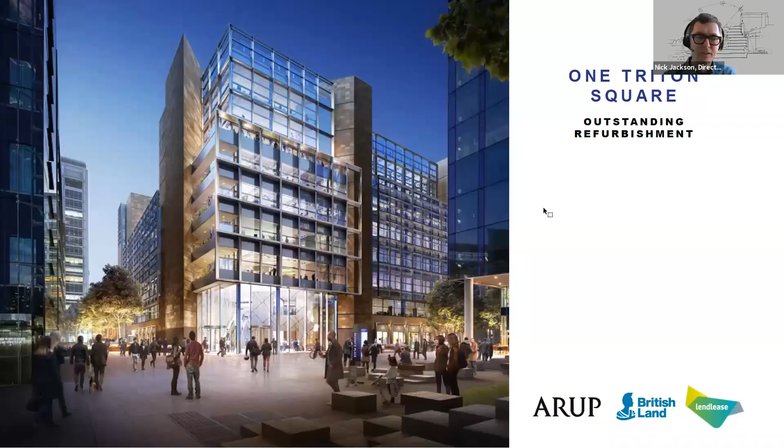Thank you, Will. Right, let me just share. So hopefully everybody can see that. So thank you for this opportunity just to explain a little bit about the work we've been doing at Triton Square. The building's been on site for 2.5 years, coming very close to completion now, and will emerge just as we come out of lockdown, actually, which will be very exciting.

I think everything I'm going to talk to you about this morning really wouldn't have been possible without the teamwork that has gone on between Arup, our long-standing client British Land, and the contractor Lendlease, who we're working very closely with. What we've achieved on the project in terms of the initiatives around sustainability and particularly carbon have only been realized through the collaboration and commitment from all three parties to achieve this.

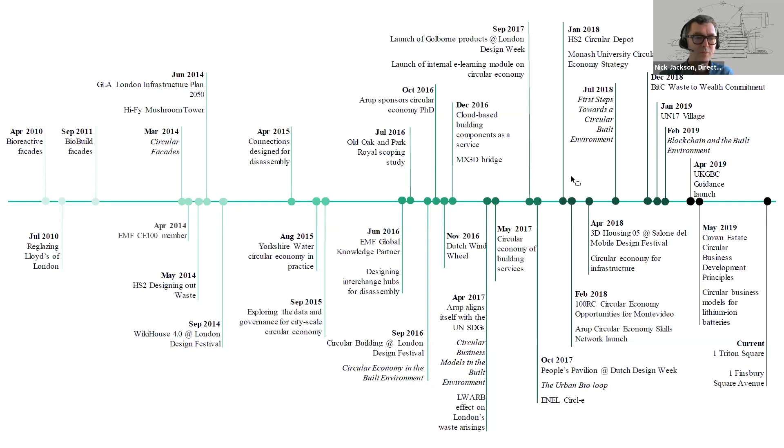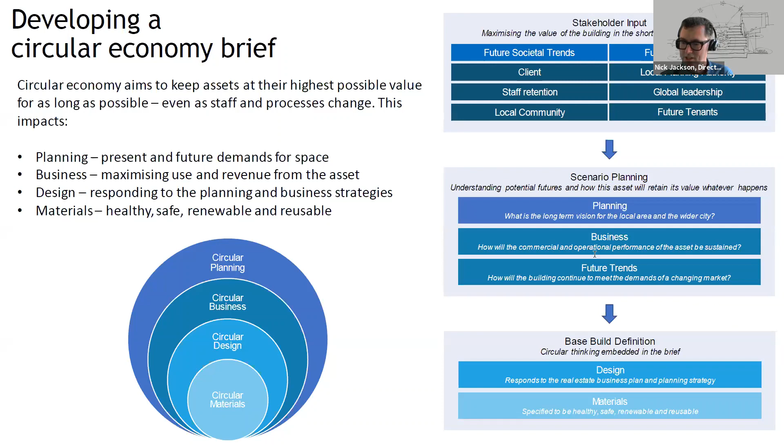Triton Square didn't come from nowhere. Arup have been working in this sector for over a decade in terms of thinking about circular economy. We've been looking at it from a point of view of investment, experiment and exploration over 10 years. We've worked in that sector developing a framework for property in terms of developing a brief that we use internally around the planning, the design, the use of materials, all building around our approach to circular economy. This works across our whole business and is a strategy that is growing very rapidly in our thinking and work.

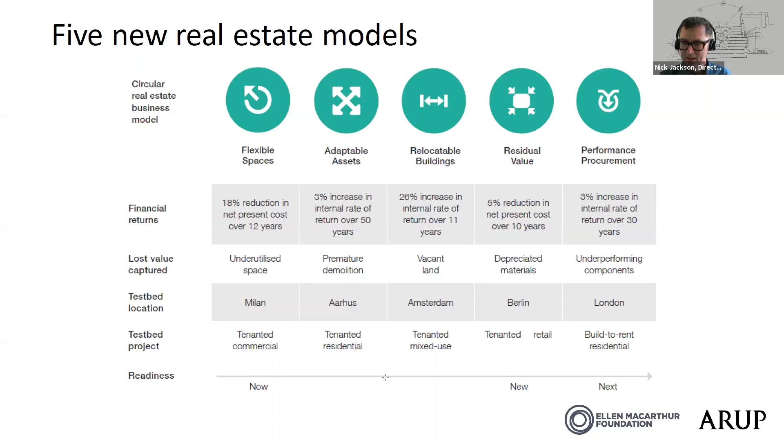Our relationship with the Ellen MacArthur Foundation is well established, and we have a very close partnership there. That has worked through equally with developing an approach to real estate across a number of trial projects we've developed in conjunction with other partners like RICS and JLL, in terms of how we embed circular economy thinking in our approach. So I just wanted to set the scene really in terms of where the thinking on the project at Triton Square has emerged from.

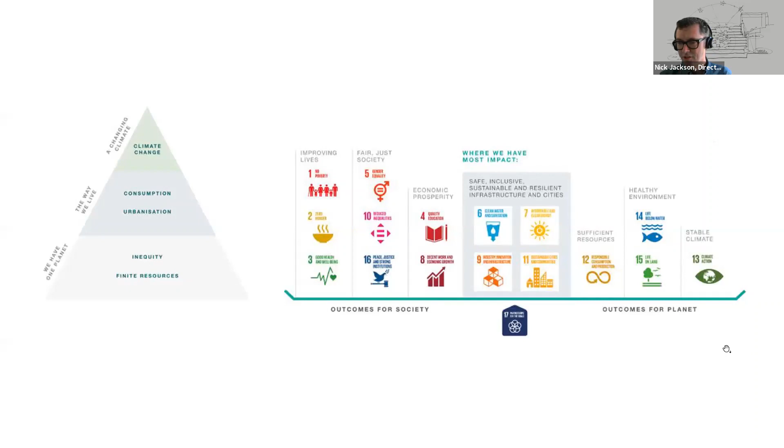That sits alongside our commitment at Arup to align our business in all that we do, and our activities, to the UN's Sustainable Development Goals, the SDGs. As a global organization, we've adopted those 17 initiatives and goals to structure our work at all levels and embed them in our strategies around design work and the projects and thinking that we take on.

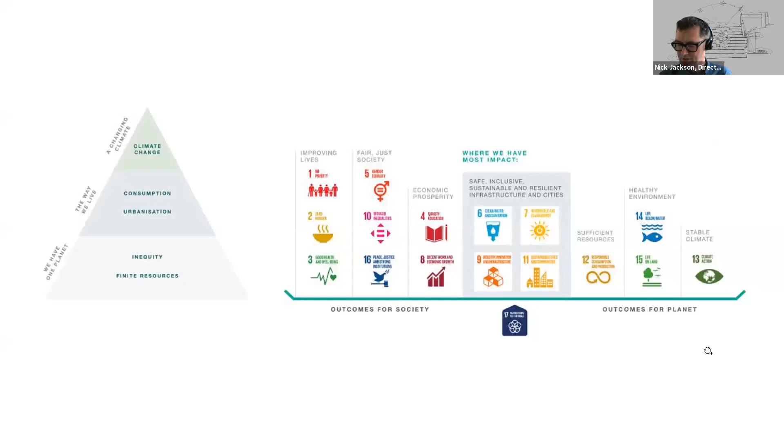At the moment, we see ourselves as on a journey. We're moving out of a point of green, sustainable design and looking increasingly to how the thinking in our work can lead towards restorative and ultimately regenerative design in the way we approach our work in the built environment.

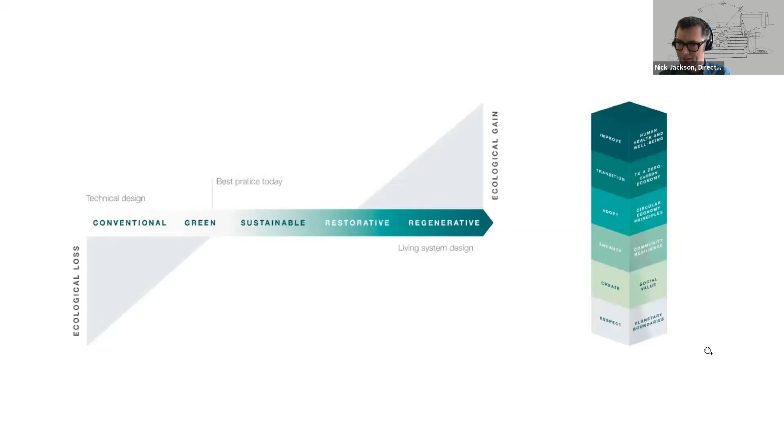So that just sets the context for Triton. The simple headline really is the work we've achieved there has saved approximately 40,000 tons of CO2 emissions over the 20-year life of the lease. That is made up of embodied and operational carbon. Obviously there are many ways you can equate that to understand what it means, but in simple terms, compared to what a car does, it's a pretty staggering figure.

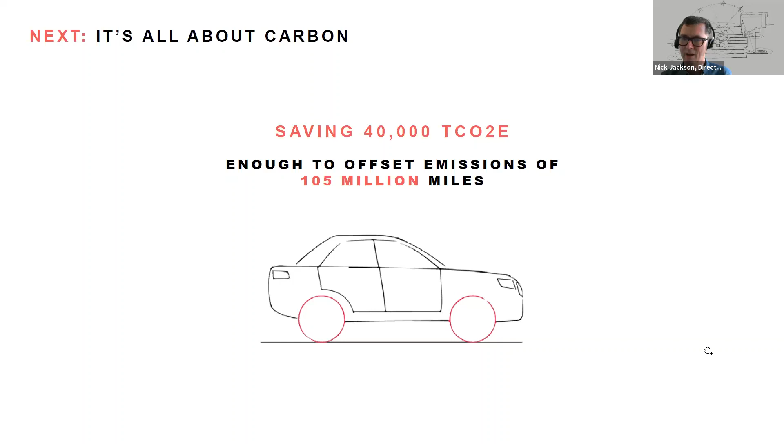That work has come from a whole series of initiatives. There are some headline design changes or design initiatives in the project we've brought to it, but there's a lot of other smaller moves, which I will explain as we go through.

So the project, just to give context for those who don't know the building - when it was pre-let to Dentsu Aegis, it was the largest West End pre-let in the last 20 years. We began with a design and brief that was about achieving BREEAM Excellent, and that has moved over the course of the project to achieve BREEAM Outstanding, one of the first buildings for British Land to achieve that landmark, and one of the few large commercial buildings of this nature able to achieve that as a standalone building not linked into a large energy network.

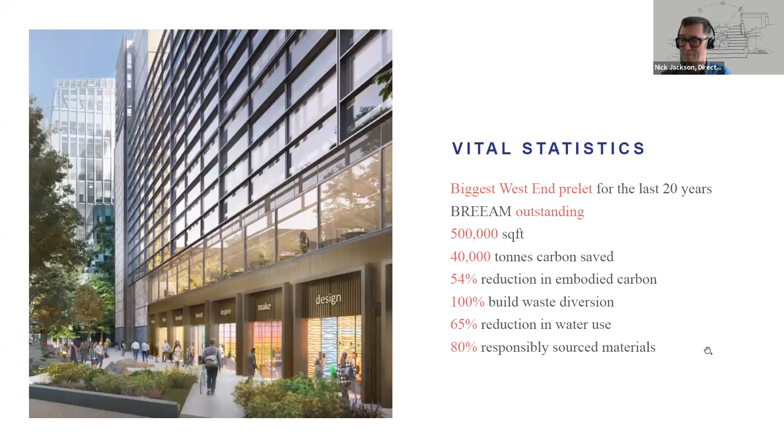It's 500,000 square feet. We've saved 40,000 tons of carbon through the various initiatives we've brought to the scheme, a 54% reduction in embodied carbon. What we did demolish was very limited, and the waste was all diverted to other uses - initiatives like plant taken off the existing building has been upcycled and reused, exported and made use of. We've made significant reduction in water usage on the building. If you think the original building was designed in the 90s, a lot of the approaches we can now bring to the design weren't available then. And 80% of the materials we've used, we've been able to responsibly source. We would like that to be higher, but that's a reflection of the marketplace we're procuring from.

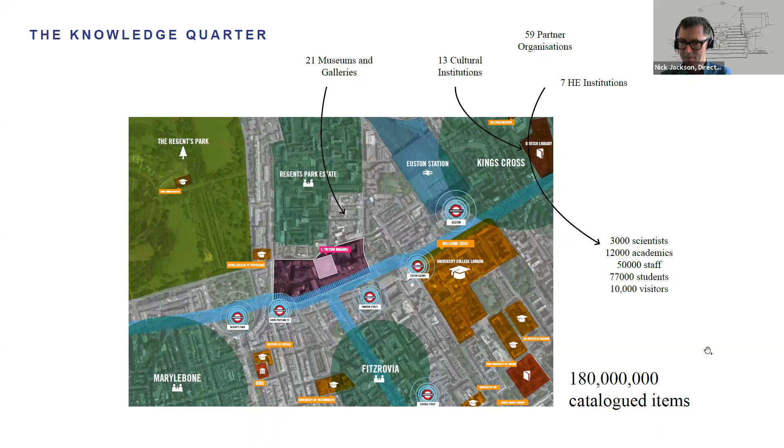The building, for those who don't know, sits in the center of Regent's Place on the Euston Road. It forms part of the Knowledge Quarter, a very vibrant and rapidly changing sector of London on the northern edge of the West End, becoming increasingly a location for research and academic work that has grown since the Crick opened. To the south, we have Fitzrovia, UCL, and Marylebone with its education institutes and museums and so on.

The trigger for the project really gathering pace was the pre-let from British Land that galvanized the scheme into moving forward. The approach we've taken to sustainability and carbon has been embraced by the tenant, Dentsu, in terms of how they're thinking about their fit out, which will start very shortly, fully designed at this point. The building will complete during April and be handed over to the tenant team to progress into fit out.

So the thinking we brought to this - in a way there are some big moves in the design thinking, but actually it's all the small moves that have been key to the changes we've made. The strategy was to look in every area of the design, every part of the thinking, and bring the same attention to detail about what we can do to reduce the amount of material we use, the carbon content of material, and the recyclability or reusability in terms of circular economy thinking.

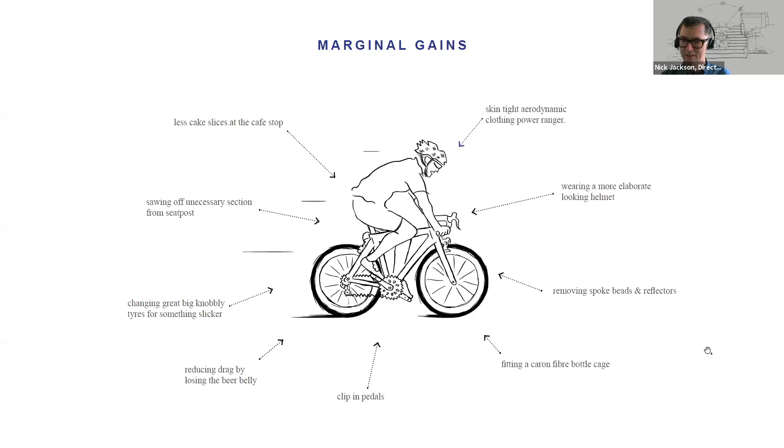That sort of initiative one sees in sports and so on - cycling is an obvious reference for that - has been brought to bear in all sorts of parts of the building.

So the headline story, like all refurbished buildings, is obviously we've been able to take advantage of repurposing and reusing the existing structure, bringing our engineering thinking to minimize the amount of new structure we need to bring to the scheme.

The approach to the facades - where we have removed large sections of the existing facades, and rather than replace them to upgrade them, we've refitted and refurbished them, bringing the same material back on site and reinstalling it - we think is probably one of the first examples of that being done in the UK, if not in Europe.

We've made other changes to the scheme, which Phil and Christina will talk about, in terms of things like changing the staircases so they no longer sit within the primary thermal envelope and are heated all the time. We've moved those so they're no longer part of the primary heated space - they're tempered so they don't get too cold, but we've moved the thermal line in the building to change the energy usage.

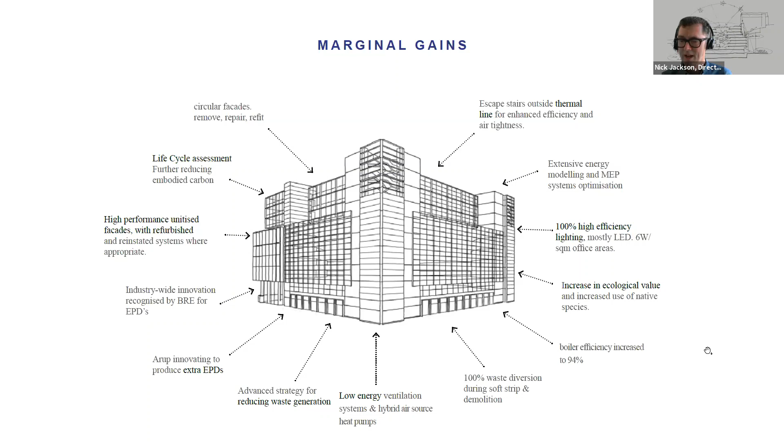We've obviously replaced all the plant on the building and upgraded that very significantly, highly performing plant. We've taken advantage of the capacity of the existing building to allow that to work in a highly efficient way, and a whole number of other strategies that we brought to bear.

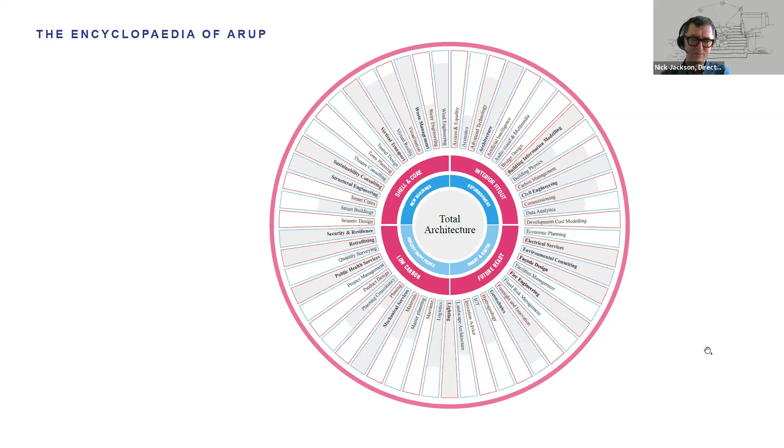Arup, the project has been designed by all the disciplines within Arup, so the architecture team who now sit within Arup as a whole, working closely with the engineering teams on structures and MEP, lighting, acoustics, sustainability, have all contributed to this at various stages of the project, particularly in the analysis of the use of existing fabric and materials. The carbon team within our sustainability team put a lot of work into this, in areas we probably hadn't looked at before in the depth we have on One Triton Square.

The brief was quite simple to us. To make this make sense for British Land as a development, we needed to double the size of the building. Now that's a pretty simple metric. Probably most architects on this talk will recognize on a big refurbishment or rebuild project, you need to achieve that level of upgrade. That was a challenge with the existing building, with its foundation system, to create that area without changing the footprint of the building. We've developed that in a number of places, which Christina will explain.

It needed to be highly efficient. We needed to be hitting very high net to grosses. We needed to make sure all the operational areas of the building worked efficiently. Sustainability and well-being were embedded right at the outset in the thinking about the building. So we needed to produce a building that had much higher ambitions in terms of sustainability and carbon energy usage than the original building, but was also still a wonderful building to be in, with really good daylight, really enjoyable to move around and work in, to attract tenants and so on. And that goes hand in hand with the quality.

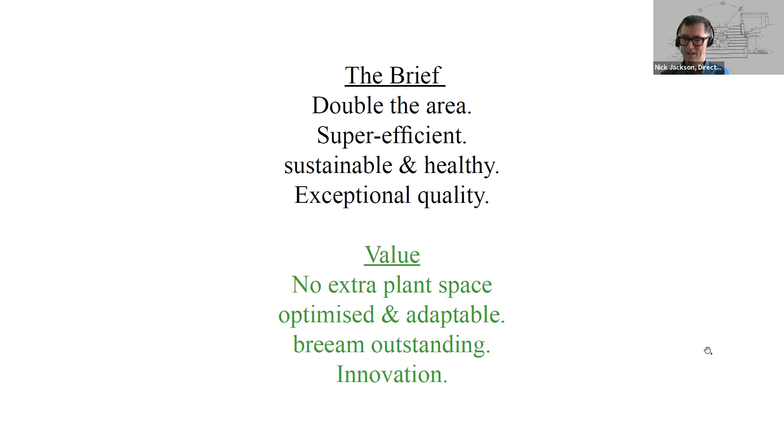The key value changes we brought to it were: we doubled the floor area of the building without changing the area given over to plant. It has a single basement, highly constrained. We put a lot of cycling into the building that wasn't there from the 90s building, cycling facilities, and we've got the same area of roof plant we had originally. It's a little bit taller maybe in plant, but that area is working much, much harder in terms of what it can deliver in terms of BREEAM rating, and that required a very innovative approach.

So originally we were just looking at BREEAM excellent as the thinking around what could we achieve. We moved that target from excellent to outstanding over the course of the project, without really the level of cost increase one might think was there. Now that cost is related to what British Land would normally see as the budget for a building of this nature, but it was very marginal. It was much more down to where we put the effort, and really thinking hard about where we spent our budget in terms of use of materials and thinking about the engineering.

So the original building, the Arup Associates building, 1998, built probably at the time Canary Wharf was really starting to gather pace. It was built as a support building really for a trading bank. It was going to be built originally with trading capacity, but used by the original tenant was going to be a support building. It was a big building, with corner cores, and it's a sort of low-rise, five-story building that sat and reflected the horizon of Regent's Place at that time.

But it was a well-built building, and the key thing is we had all the records and all the information on how it was built. So we had all the drawings, we had all the working drawings from contractors like Shepherd, and we had our own design drawings and so on, the engineering. That was a fundamental prerequisite in terms of the re-engineering of the building that we were able to go through with the new design.

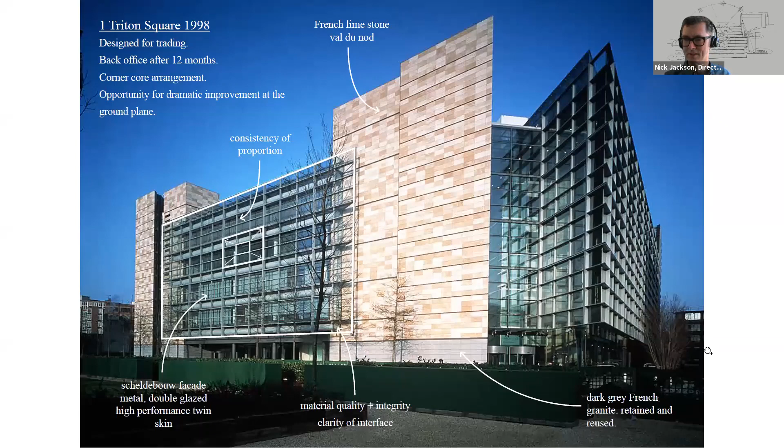So the existing building is quite deep in plan, and it has this unusually large octagonal atrium in the centre of it, with a roof light above that.

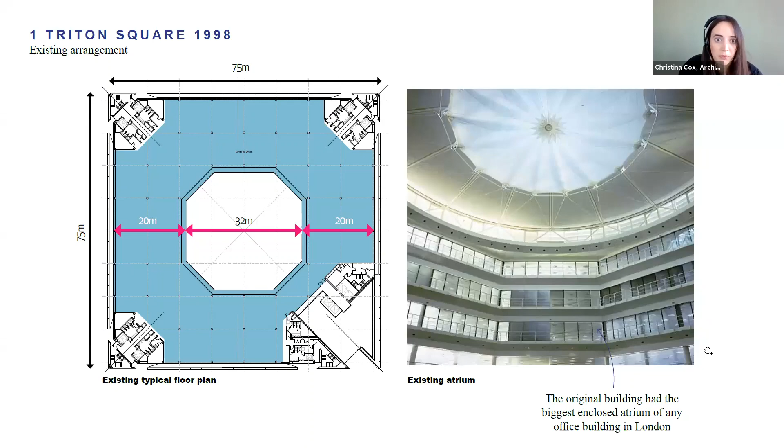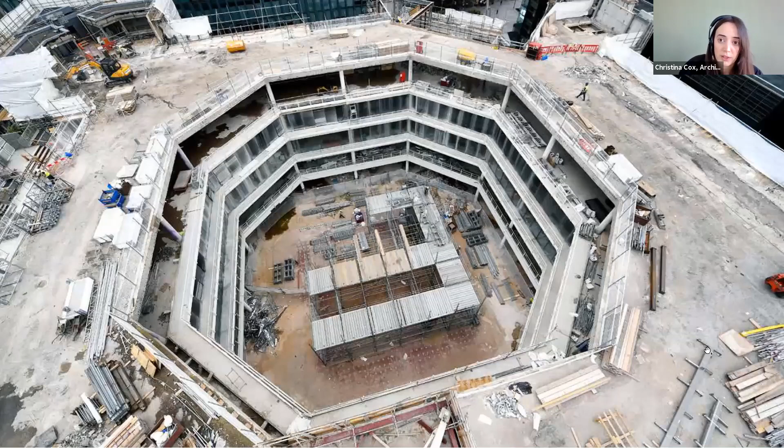This is just an image towards the end of the demolition phase, where the plant is all removed from the roof. The roof light's been removed, and the top of the cores have been removed.

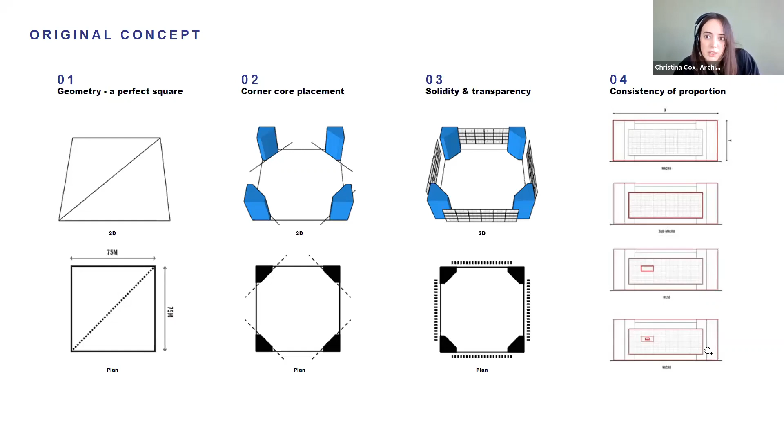In terms of the original concept for the building, the original design principles included the plan was perfectly square. There are 4 corner core placements, and on each elevation there are these secondary screens that clad each elevation. There's also consistency of proportion from the macro, in terms of the overall elevation, right through to the micro, in terms of the individual panels that make up those secondary screens.

So when we were considering the refurbishment of the building, it was important to be considerate of these original principles.

So the key interventions for the refurbishment included consolidating that central atrium, bringing it in from 32 metres across to 17 metres, and extending the cores upwards. And then when we extended the building upwards, we set back those levels, not only to create some amenity, but also to maintain that consistency of proportion across the elevation.

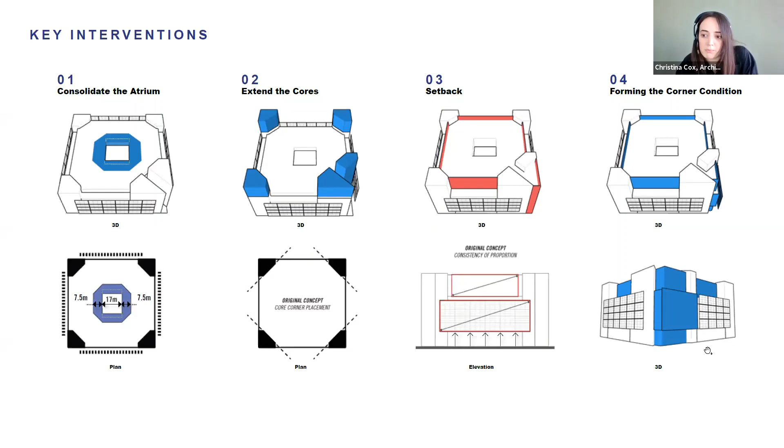And then finally, just reconfiguring the main entrance area to create a more dynamic reception area that fronts onto Regent's Place.

So in terms of the building organisation, the 4 cores serve the office levels, which are at level 1 and above, and the ground floor plane, which is mixed use, is accessed via the perimeter.

So originally the ground floor had an undercroft that cut right across the centre, and the ground floor facade was also set back. So we've pulled the ground floor facades out to better address the public realm.

To the north, there's an affordable workspace area. To the west and centre is a large gym area with a cycle storage area in the centre of the deep plan. To the south is a dedicated secondary entrance for the office, a retail space, and the main entrance facing onto the plaza.

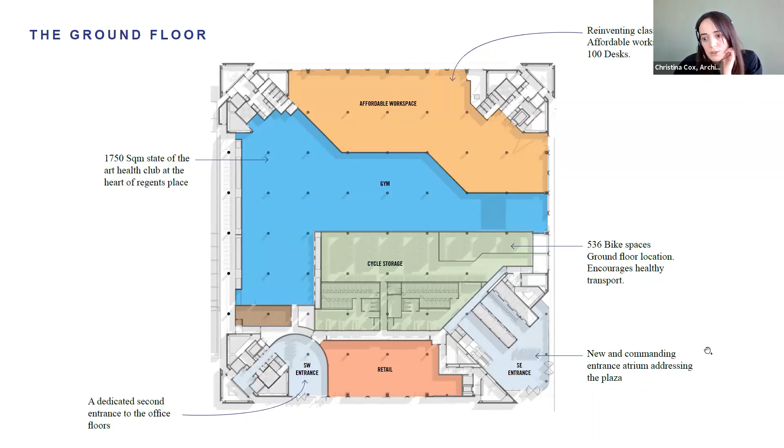In terms of the typical upper levels, as mentioned, the atrium was infilled. So the atrium has a stepped profile to create a more dynamic space. The lifting strategy was looked at, so we've reworked all of that.

So the main lift bank now includes an extra four lifts, an increase in the washroom areas in the cores, and also infilling the 6-storey atrium that's sat above the original entrance, not only to create more floor area, but also these smaller balconies that look out over the Regent's Place Square.

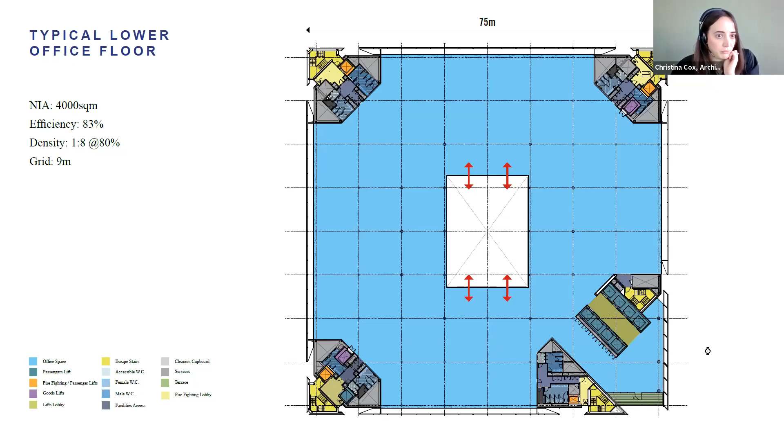And so through those interventions, we managed to increase the office area by 85%, and, as Nick mentioned, with no additional space for plant required.

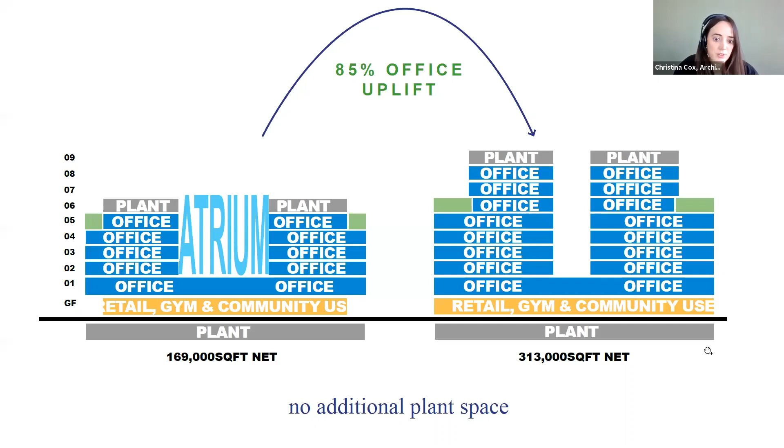Thank you, Christina. So within that move to create this almost doubling in the net area of the building, the work we started doing as the project developed in the early stages was looking at the combination of what the operational carbon was, which I think was a sort of well understood principle that sits within what we do normally, but starting to look increasingly at the impact of the embodied carbon.

And a key factor for us, as we look forward to other projects we're now dealing with, is that as the energy supply grid increasingly moves towards all electric buildings, we see most of the buildings we're now designing are all electric. As the grid cleans up, the emphasis and importance of really understanding the embodied carbon in design thinking becomes increasingly critical.

That underpins the deep rationale we're now asking ourselves with all our projects across Arup: when confronted with a proposal, is there something there we can reuse? Do we really need to replace a building, or is there a way we can repurpose it? If it's in one use, how could you transform it into another? And what can we do, in terms of bringing all our engineering and design thinking, to understand the impact of that? Because we see embodied carbon as an increasingly important factor in the overall carbon impact of projects.

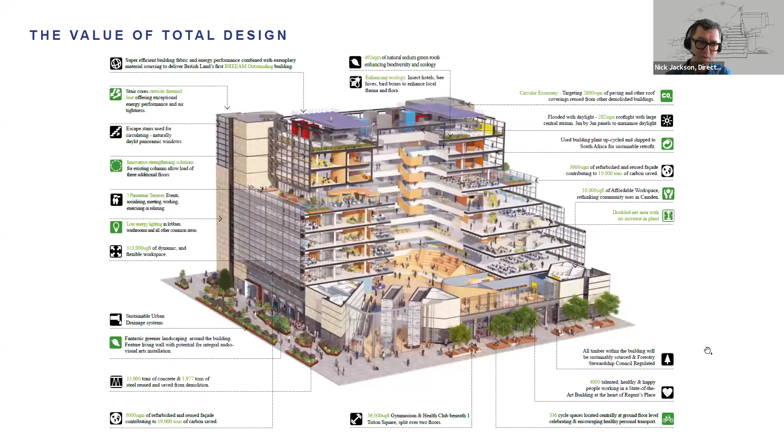We've got recycled paving and recycled ballast that's come off another building that we've been able to use on this building rather than going out and buying new river ballast and new slabs just for walkways. The existing building had 35,000 tons of concrete and 1,877 tons of steel reused.

We've basically inserted this sort of new structure in and around the existing structure, adding floors down over the atrium that Christina talked about, inserting new structure in terms of additional piling underneath the building to pick up the load, and then a very light, efficient composite steel and concrete structure going on top with all the concrete GGBS, low carbon concrete.

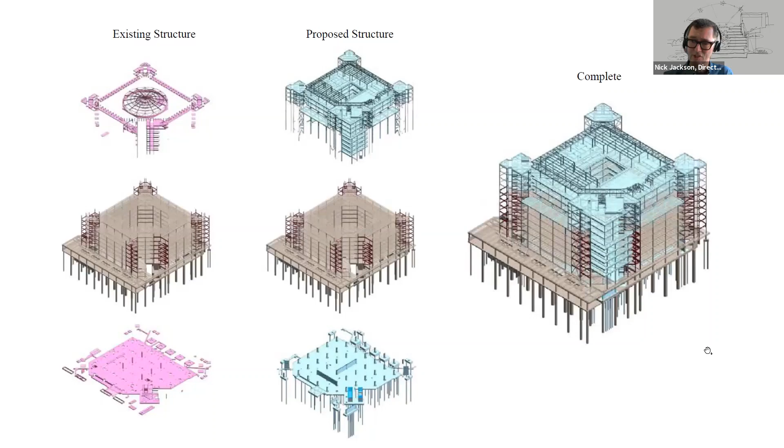We might consider now whether we could use timber for this, though that's still very challenging in commercial buildings. We looked hard at where we were having to use concrete to really reduce the amount of carbon in that, so we have this lightweight steel frame that drops in over the existing building.

Our engineering colleagues and the structures team did a lot of work to reanalyze the existing foundation system from the design records we had, and relocate or reapportion the way we were using the loading within the building, because the building had quite high loading in some areas. We were able to transfer those loading allowances around to create the capacity in the building to get this extra space.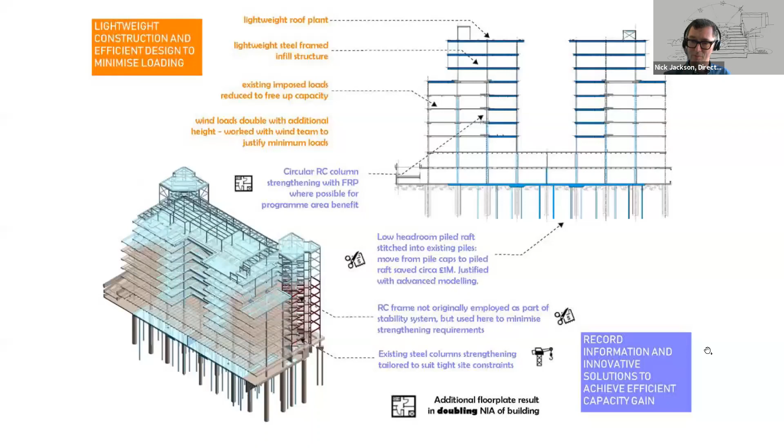Down in the ground, that was pretty heavy work in places, working underneath the existing slab. We had a low headroom piling rig in there. Where we could, we were using carbon fiber wraps on columns to strengthen those, and that was in conjunction with threading piles in.

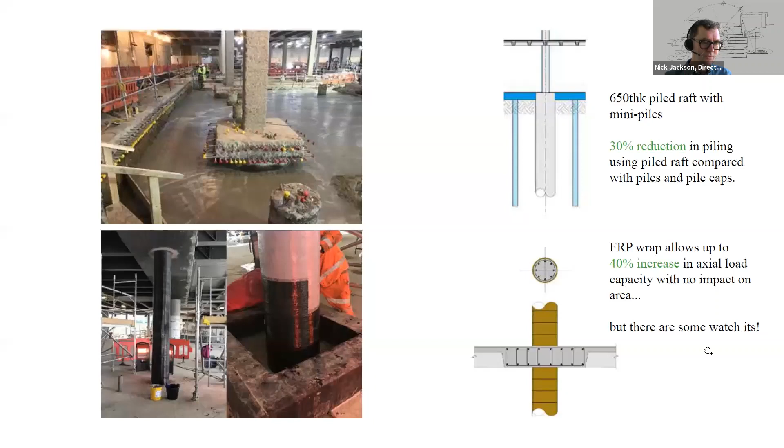There were localized areas where we had to take the existing slab out to thread piles through. But because of the analysis around the engineering, and because we had the records, we were able to have confidence in how we combined new and old. That meant we could reduce the amount of caution going into some of the design decisions, to really make sure we'd optimized the design of that foundation system.

So nice view here through the basement while that work was going on. You can see in the distance there some little steel frames going up around.

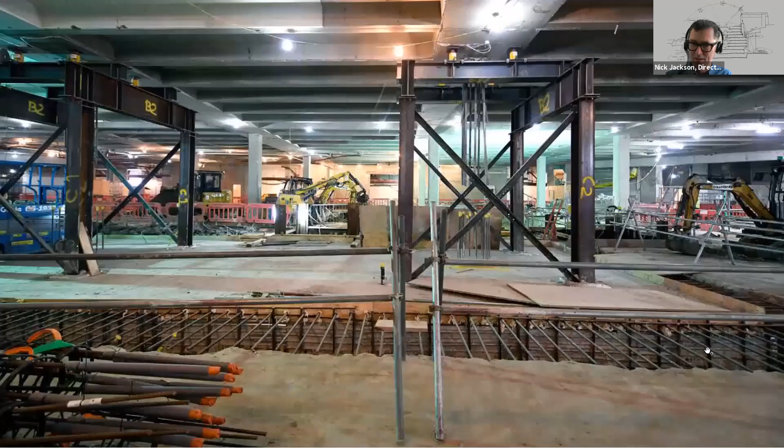There were one or two columns that, despite all that analysis, we couldn't justify when we assessed the as-built condition of the concrete. So there were 5 or 6 columns where we had to prop the building, take out columns, knowing the reinforcement was there, supplement that reinforcement and recast them in key locations around the atrium where they were picking up the highest load.

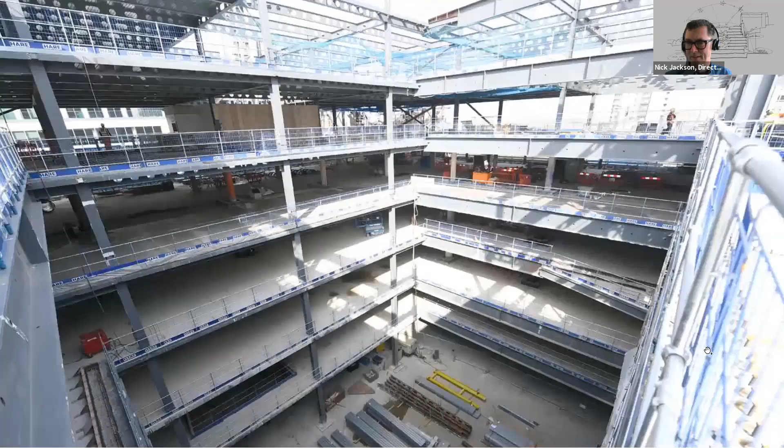So this is the reformed atrium, still a very, very generous space. It's a fantastic space to be in. Once the tenant is in there, they're adding some staircases, I believe, to run between floors, which will be a terrific heart to the building.

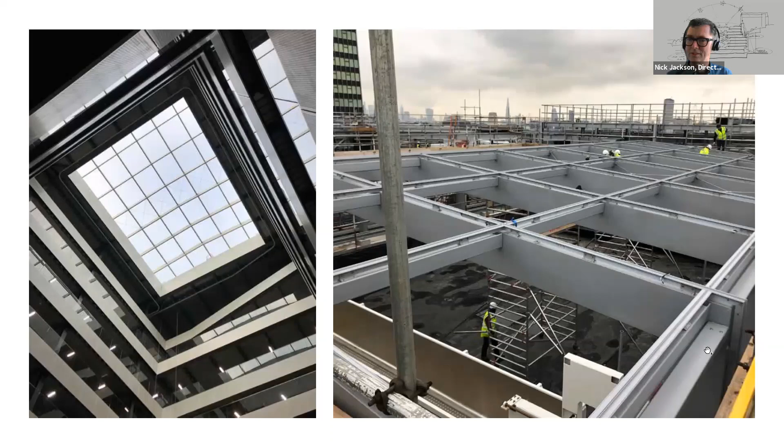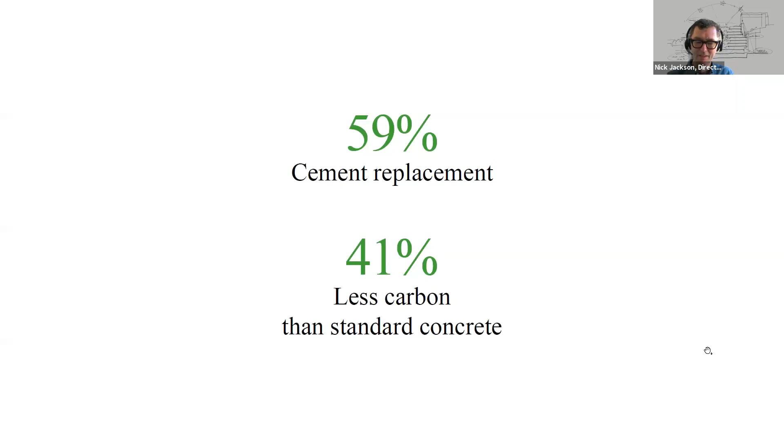New roof light lets light down, and it's got a very nice, simple, elegant graphic quality to it. The concrete work in the new structure had 59% cement replacement, 40% less carbon in that element than we might have expected in a normal hollow rib type floor system.

The last part of this short discussion of what we've done - we're going to explain the approach to the facade, which is pretty unique, we believe, in terms of work on a building of this nature, really being able to combine new and old structure. So Phil, I'll click through as you go.

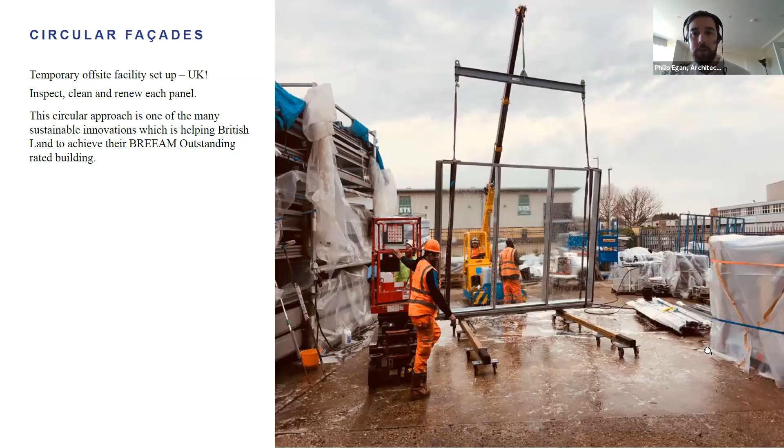We had around 3,000 square meters of facade on the building that was refurbished. This was taken off the building and sent to a factory in Basildon, where it was inspected, cleaned up, gaskets replaced, repaired, and glass panels replaced if necessary. So it's just a photo of that - go next slide.

So looking at the building as a whole, we basically tried to retain as much as possible.

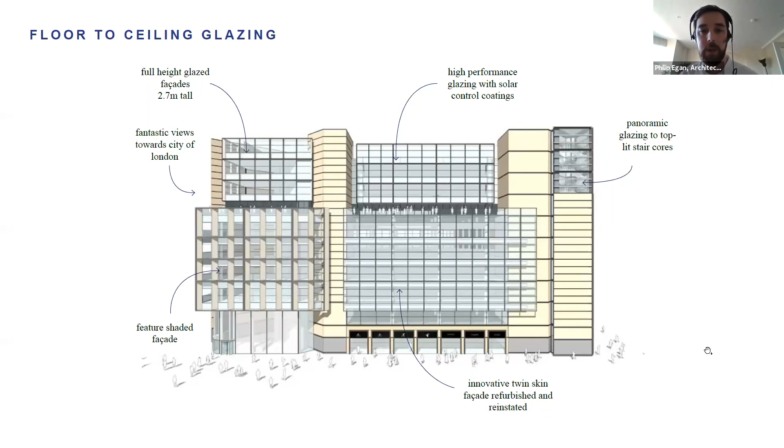So moving on to the cores, as Nick mentioned previously, we're retaining a lot of the facade at the lower levels, and we've got new glazing panels at the top, which give us great views out over to Regent's Park, over to the financial area of the city, and also up to Parliament Hill.

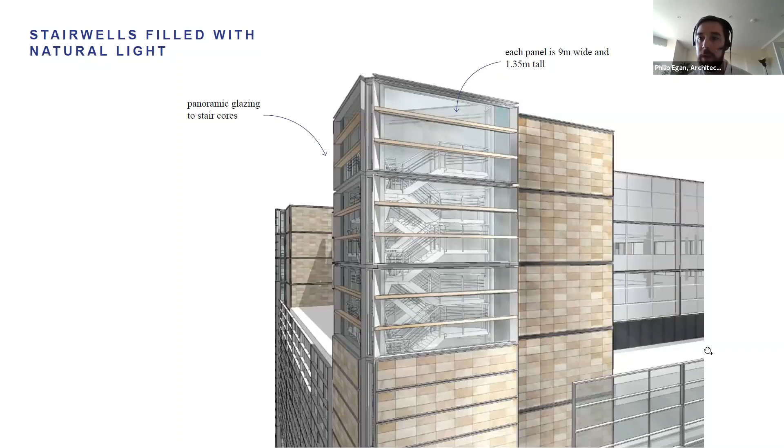Can you go back to that one again? So that lets a lot of light down into the stairwells, and we also moved the thermal line back towards the office itself. The existing facade was somewhat leaky, so we thought it was a better opportunity to do that and have a second layer of defense for the building.

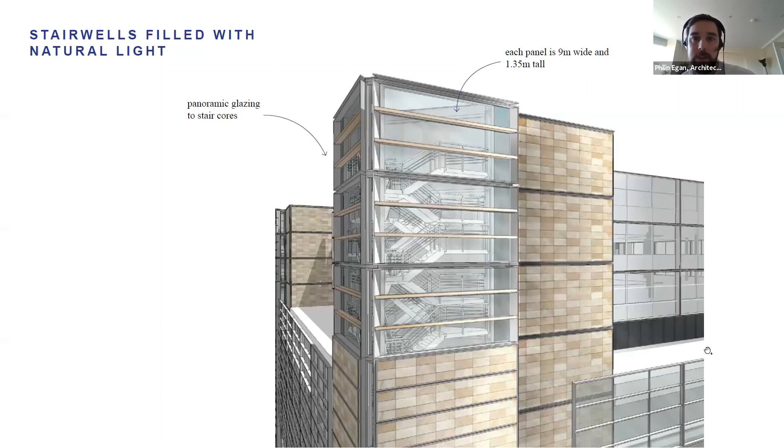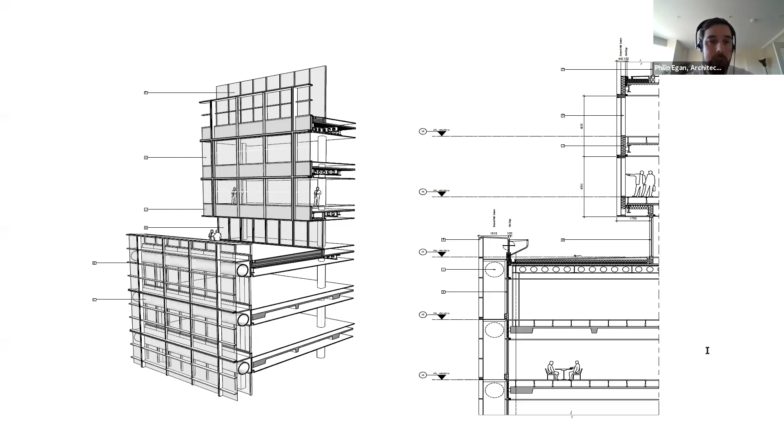Moving from top to bottom of the facade: at lower level we removed a whole band of the facade, took it off, refurbished it, and put it back on at a high level. The outer of the double skin was refurbished, and the inner had new, more energy efficient glazing. We then got 6 meter wide terraces up at level 6, and from there a new facade upwards, with energy efficient coated glass and brise soleil on different facade elements.

And the saving in transport on this, by not taking it back to the continent - this was originally manufactured by Schelderbau - not taking it back to their factory there was enormous when you totted up the carbon impact of simply not moving this amount of material around Europe.

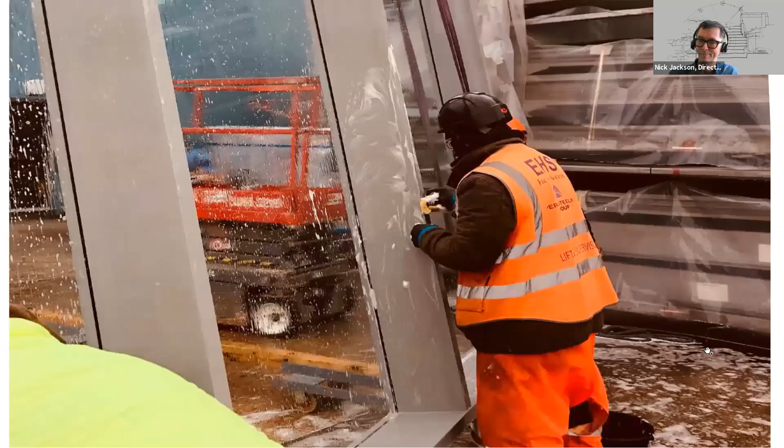More cleaning photos on site. And Phil, I think the powder coating was all checked and tested - that was all durable. It might have been beyond warranty, but it was all in very good condition, to be fair.

So we only needed to replace one or two glass panels, and we had existing spares so we were able to replace them like for like. The samples we had compared against the existing PPC were pretty much a perfect match - there was very, very little fading on the existing, which is a testament to the original quality of the building and the panels that were installed.

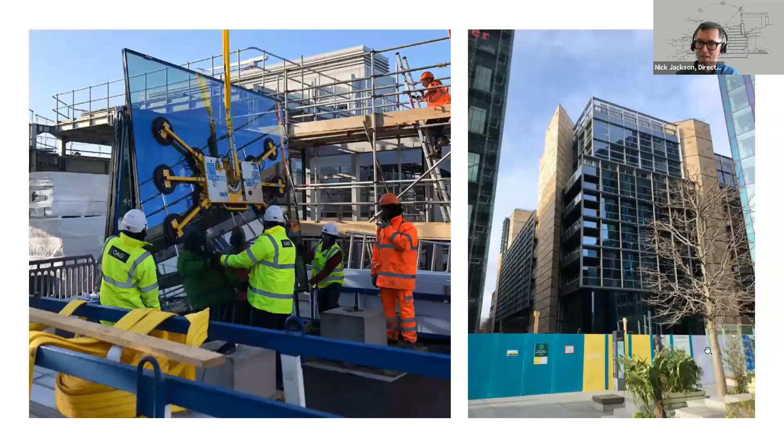Another key point was that it had been assembled in a way you could take apart. Not only did we have the drawing, so we knew how it had been assembled and put together, it was all basically able to be dismantled. The amount of silicone and adhesives in this was very low really, so it's a simple mechanical process.

To the left is the image of the 3 meter by 3 meter glass panels that went onto the atrium roof, to let all that light down into the center of the building. To the right is the current status of the building from the plaza - we've got the new entrance glazing in, GRC fins above that, and then new glazing above that.

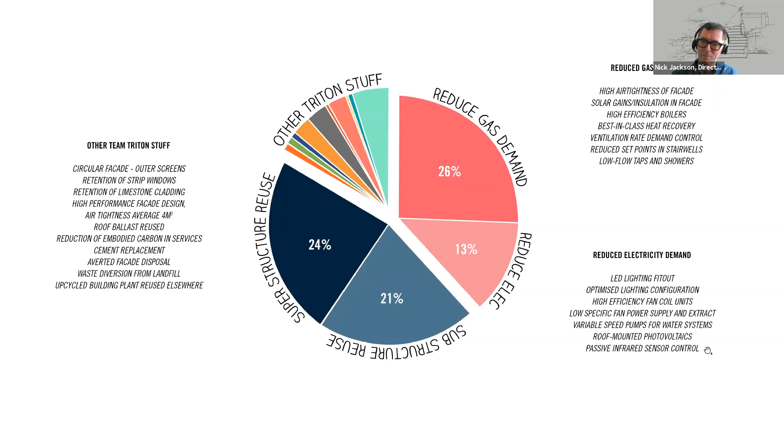is the area we've been able to influence through the design thinking, the approach, the engineering, and the work with British Land and with Lend-Lease, to try not just to reduce the slices but to make the whole pie smaller. You could create the same diagram for a conventional new build building under construction elsewhere, and not only would the pie be a different shape, it would be much bigger, simply in terms of carbon content.

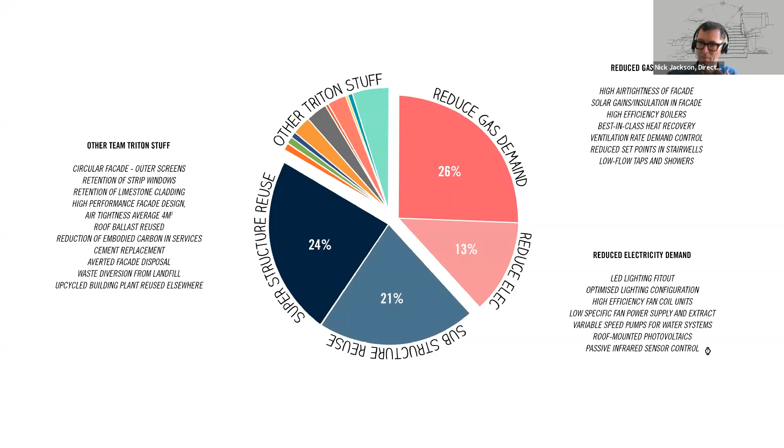This is the work our sustainability team have been developing within Arup as a whole, and now we go through this on all our projects. Really, the last part is that this has all been about teamwork — that's been the key enabling aspect, in terms of the shared ambition.

Thank you, Will. So back to you. Thank you very much, and congratulations on the project — really, really interesting, and not quite complete either.

By the sounds of it, the fit-out — you were saying you were due to finish the shell and core at Christmas. Obviously the last 12 months have not been the easiest time to carry on constructing, but Lend-Lease have done a fantastic job keeping the project going with support from their subcontractors. We will complete the shell and core in about the next 6 weeks or so.

And then the tenant team will come in and commence fit-out, which I think is on the order of 12 months for them to fit out until it's fully occupied and alive.

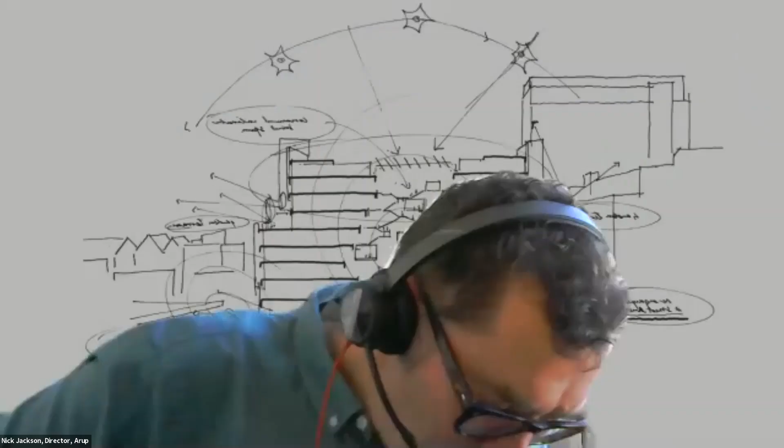Obviously you're not going to stop doing new builds, but in a way what we're trying to say is we don't think it should be a special project. In 10 years' time you'd like to look back and see that for most businesses, this is the starting point when you look at a project like this.

The principles of circularity are entirely reliant on the quality of that information and data. The buildings we build now, if in 25 years' time we can keep doing what we've done on Triton, it's wholly reliant on whether the quality of the building in the first place was at the right level, and that the data is there so people can repurpose and understand what they're doing. Otherwise, it will just be wasteful in material terms.

But as you were saying, the cost on this one was marginal - really not much more expensive than doing a comparable new build.

So is that enough to convince clients in a really important way, so that most clients go down this route?

Yeah, the cost premium we were trying to say, from going from excellent to outstanding, was minimal, right? Really, in the context of the quality of building British Land would normally build, the increase there was minimal.

Yeah, absolutely. I would hope all clients, when they're sitting looking at an existing building, scratch their head really hard and understand what the embodied carbon in that building is before they start taking decisions to demolish. I think that's beholden on all of us currently, where we sit with the planet and climate change and so on. We have a moral obligation to be doing that with all our work.

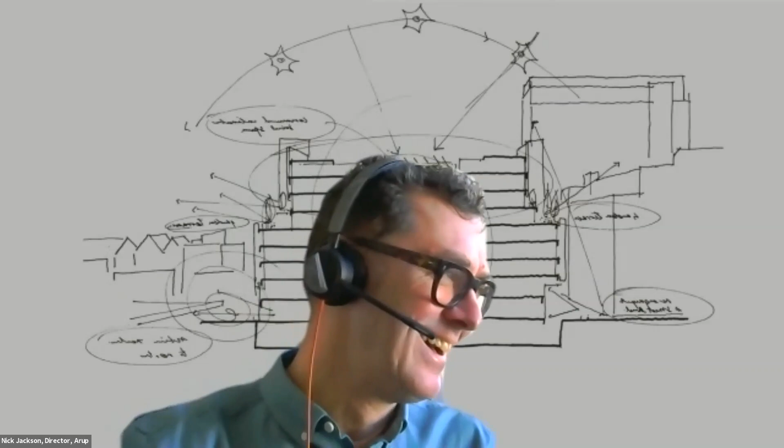These are tough questions. This might be related to the BREEAM assessment. I think it might just be down to certification - in terms of BES 6001, it's quite difficult to get that certification for a lot of materials. We tried our best to get certification, but that's largely related to UK products, so if we were looking at products from Europe, sometimes it was difficult to get those. It's not necessarily that they weren't ethically sourced, it was just difficult to get certification for them.

Another question about materials, looking beyond to perhaps this building having additional lives. Ralph Waterfield asks how Arup will ensure documentation is available to whoever might want to do another refurb in 30 years' time.

Good question - this is about open sourcing. There are two parts to that. We spend quite a lot of time digging out our records. Arup, as an engineer, like a lot of the big established engineers in the UK, gets inquiries about previous buildings from time to time, and we keep our archive and supply data on other buildings when asked. We're in the middle of crawling through what the record drawings and documents look like for this building at the moment, which is pretty substantive.

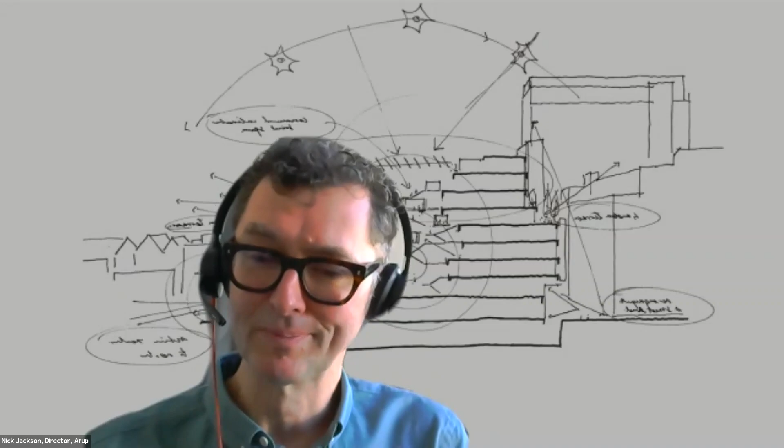Yeah. Sorry, we've got so many questions, I'm just reading through them all.

Ali Ayad asks, what type of procurement strategy have you used on this? Phil, do you want to take that?

So, design and build in this instance. Lend-Lease were appointed at the end of RIBA Stage 3, which I think these days everyone would recognise as a fairly well developed design - not like the old RIBA Stage D, it's well into old E. Arup were novated across to Lend-Lease, and we worked with them through Stage 4, all the packages, and then it was procured as a series of packages.

I think it's interesting because we had early engagement from the contractor and from the facade subcontractor, which was very useful. We were able to delve into the details of the facade, taking it off and putting it back on at a very early stage, which was really beneficial for the project. The fact that the facade contractor, Gartner Schellerbauer, as a business is still there - which is not necessarily common among facade contractors 25 years later - and that they were willing to engage and pick up what they'd done before, was also a key part of the process.

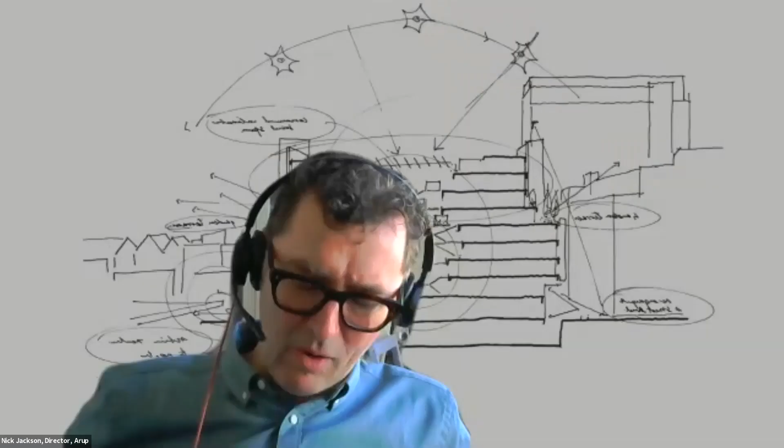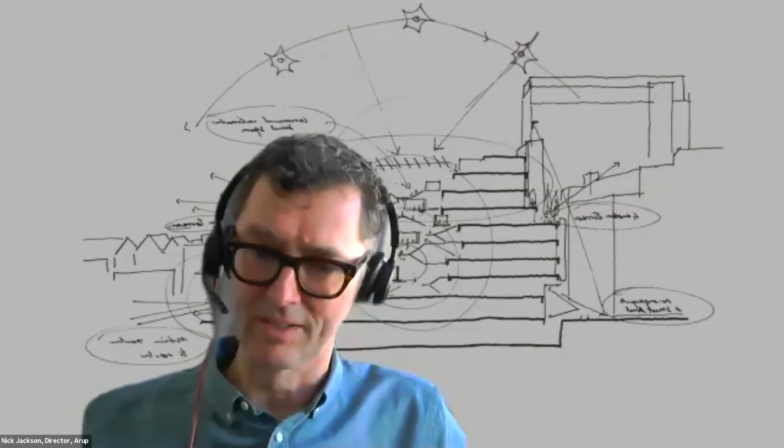Yeah, well I think you've seen from the conversations you've had with them over the course of last year the value they put on their impact on the environment at a corporate level and the strategies and policies they've put in place. If you go and talk to Juliette Morgan about the work she is doing within British Land, it's really inspiring what they're trying to do and how they're trying to change their own mindset on all their projects - the work at Canada Water, the work they're doing in the city at Broadgate and so on. Those are all similar agendas, different projects, different ways of playing it out, but the support they gave to the project was absolutely fundamental. If they hadn't been engaged with that conversation and really pushing it, then we wouldn't have been able to do what we've been able to bring to it.

Now a question about the steel. Robert Saculo asks if you could say a bit more about the reuse of steel - did you have to melt it down and re-roll it, for example?

Well, no, it was all wrapped up in cement and concrete. It's a staggering figure when you look at the amount of reinforcement in an in-situ concrete frame building like this, designed in the early 90s with high loads - there is a lot of steel embedded in there. So I don't think, Phil, Christina, there's not an awful lot of exposed steel. There's some in the stairs maybe, I guess, isn't there? Yeah, it's mostly in the cores, and that was strengthened where it was needed to be. So no, Robert, I'm afraid we didn't take anything and melt it away.

There was glass that was recycled. So there is some elements of glass that we weren't able to reuse, and that was put back into the glass processing industry and was able to be put back in and melted.

Now a question about the fit out. Mathieu Dib asks how involved will Arup be in the selection of material for the tenant fit out to make sure the same goals are reached in terms of certification? Yeah, well the fit out's being designed by Sheppard Robson, but with their client Dentsu Aegis, they are aiming, I believe, at the same BREEAM Outstanding. I think, isn't that right, Christina? Yeah, so we're close in certain parts of the building, obviously in conversation, but Arup, we're not involved in that design work.

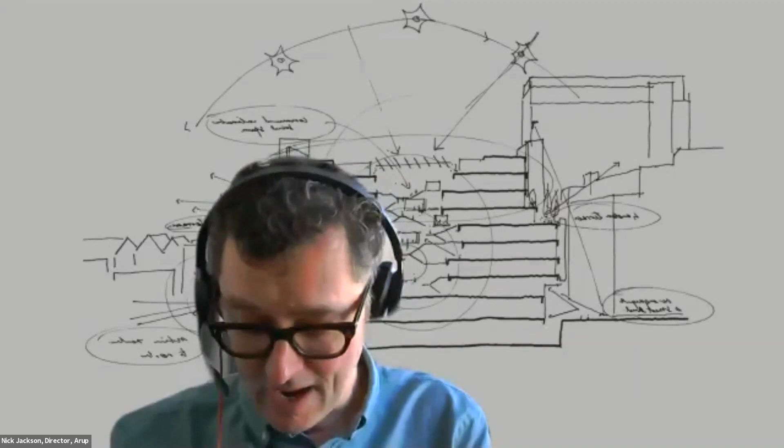Arup is moving into a building just developed next door to our offices on Fitzroy Street, which we've done the engineering on for Derwent. That's an all-electric building we're moving into. On that building, we've gone right back to sourcing the electricity from a power provider using a regenerative system—we've secured supply from a known source we know is green. That, I think, is the future. Less gas is definitely where we're heading.